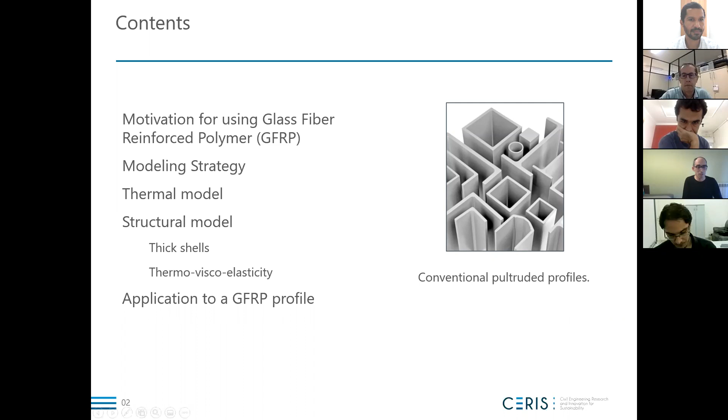In this figure, we can see a conventional pultruded profile. Pultrusion is the way that these profiles are made - in fact, I will show an image in a while about it. So FRPs are a wide class of composite materials consisting mainly of two parts: polymeric matrix reinforced with fibers. This way, these FRPs are in general very orthotropic materials.

They are applied in a wide range of fields, from aerospace, naval, automation, to structural engineering problems. Here we can see some facilities on production and also an example of application over a bridge. Applications in civil engineering are more recent, and they have a narrow way of applying them.

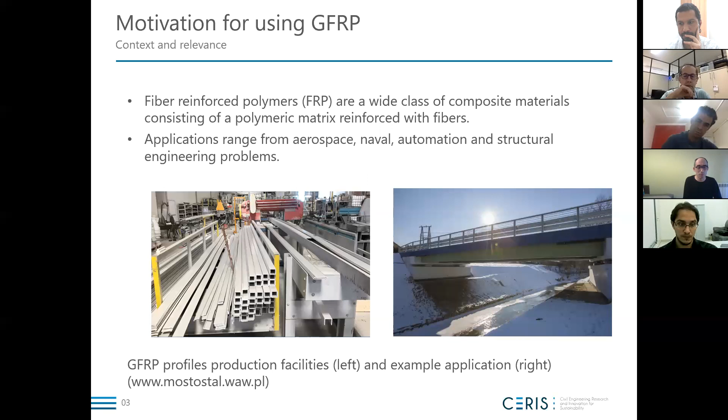So they are not - civil engineering is a field which is very conservative. Mainly it's always the steel structures and the reinforced concrete. So composites are more difficult to apply than the other, more traditional materials, and we will see in brief why.

These are some examples of applications of bridges, like this bridge in Switzerland, a bridge in Spain, and a building in Switzerland. So these are all made of FRPs.

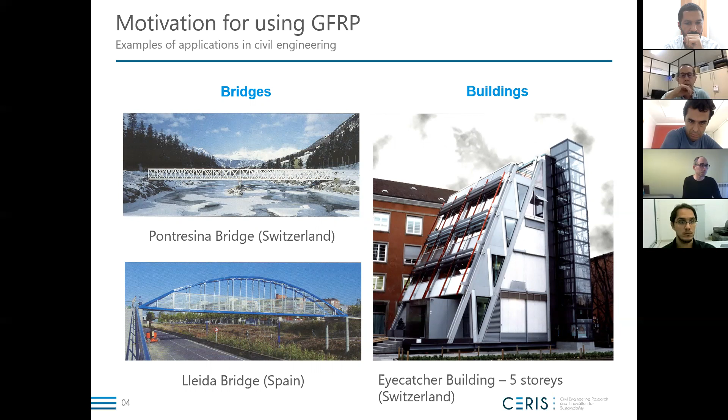As I told, this particular FRP, GFRP, is made of polymeric matrix and E-glass fibers. The process to produce them is called pultrusion. So what are the advantages and disadvantages of this kind of beam? They are very light, they have a high strength and high durability.

Well, the durability is more on interior applications. In the exterior, they can also suffer a bit over a large period of time, mainly due to the ultraviolet rays.

So what are the disadvantages? The initial and production costs, their high deformability, the lack of standards and codes which are very well established for other materials, their brittle failure, and the fire behavior. I will detail here this last aspect - the fire behavior will be the main focus of this talk.

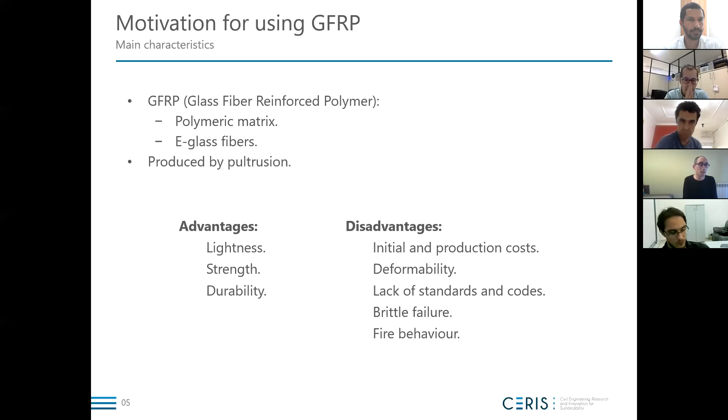So, what happens when we expose a profile made of GFRP to fire?

They have poor fire performance. When exposed to high temperatures, the matrix softens and decomposes rapidly, compromising the structural integrity. Although the fibers can still stand, they don't have a way to transmit the load that they can absorb.

So our objective is the development and implementation of a model capable of predicting the thermal and structural response of GFRP profiles subjected to fire.

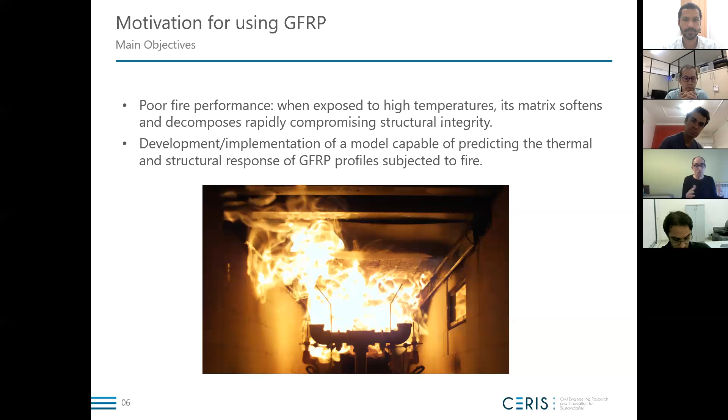Moreover, we also want to propose guidelines to designers, and if possible, guidelines to future standards and codes, because they are right now under development here in Europe.

In order to achieve a successful model, it's necessary to resource experimental laboratorial tests and also collaboration with industry manufacturers. In fact, the project this work was developed in includes a manufacturer of GFRP profiles.

It's called Alto Perfis Pultrudados, and I myself visited this factory, and we were able to see how the profiles are produced, to have more insight into the material that we are trying to simulate.

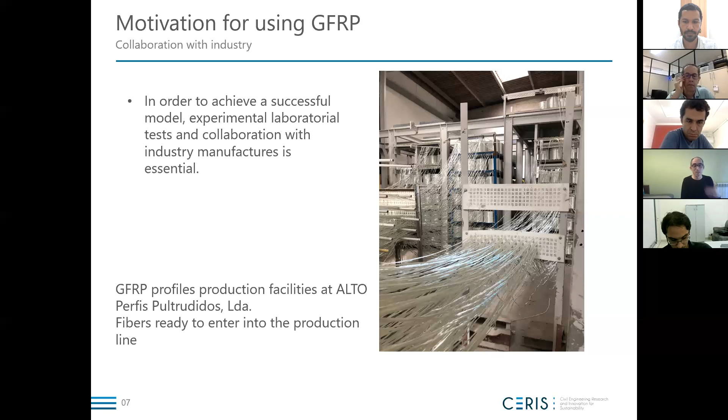Here we can see the fibers ready to go into the production line. Actually, the production line is quite simple - it's only the machine we see on the left side, and the fibers enter on one side together with the matrix, and on the other end we have the ready profile. So the process of producing this kind of profile is relatively simple, although expensive.

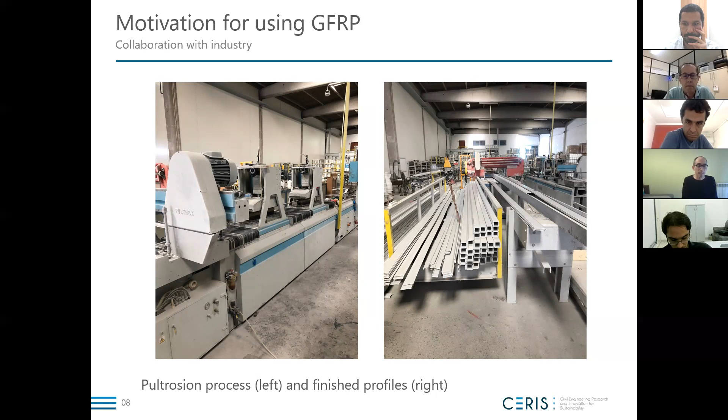So with 4 concentrated loads, 2 reactions and two loads, the loading we will apply consists of 2 constant vertical loads, made constant over time, and then we have the application of temperature underneath the beam.

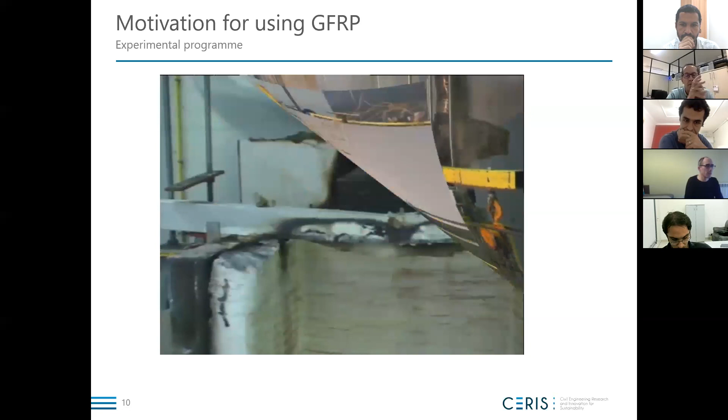So these kind of tests were made some time ago. Presently, we don't do this kind of test anymore, or we don't do it exactly like this, because we found some limitations.

The first limitation is that we want to emulate a beam inside a building, and the open air convection we realized changed a bit the thermal exposure. Also, this open cell allows a flux of air along the longitudinal direction, which we know would be very reduced inside the building.

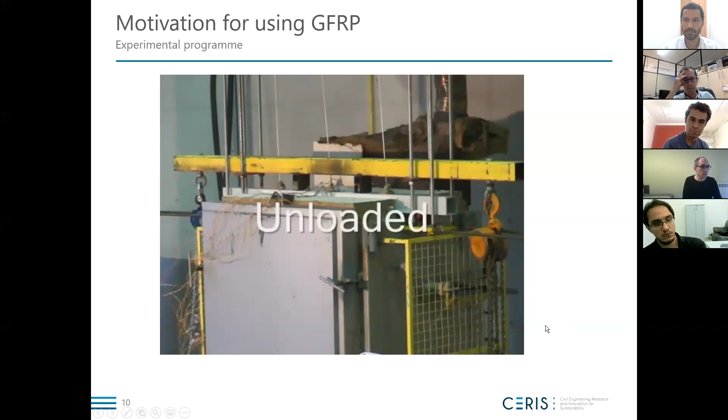Now the apparatus is slightly different from the one we used at that time. This is a more recent test, and we put this kind of protection around the beam.

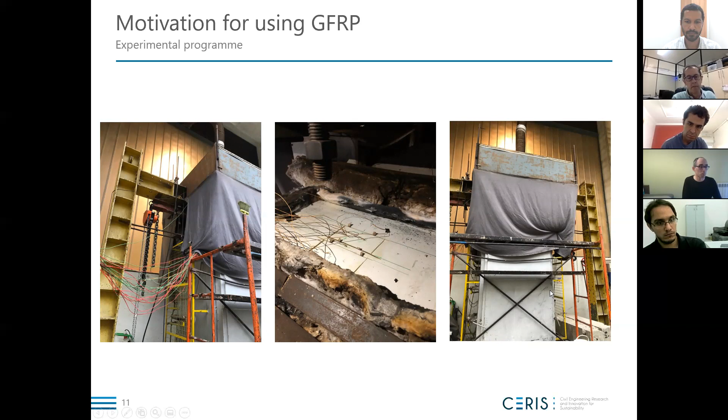Here we can see all these wires - it's merely to measure the thermocouples, the temperature of the thermocouples. And here it is shown how the temperature looks, how the beam appears at the end of the experiment, at the top of the beam.

So, in order to achieve a trustworthy structural model, the temperature distribution has to be correctly represented. The optimal cross-section design of such profiles many times includes cells.

Here we see a single cell on the left, which was the one tested in the experiment that I showed, and the one on the right is a different one, a Fiberline 300, which has 3 cells.

So the temperature distribution will strongly depend on the air convection inside the cells that we see here. Moreover, there are other phenomena like internal radiation that cannot be disregarded.

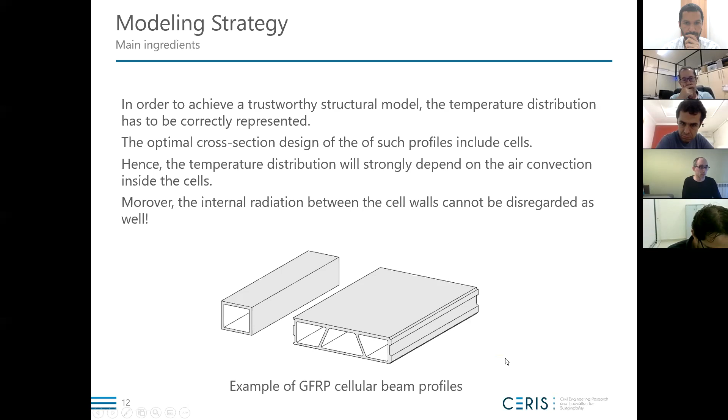Well, as for the mechanical part, we have to use for sure large strains, temperature-dependent materials, and full 3D constitutive models, including anisotropy and viscosity. The main variables here, of course, are the usual displacements.

So why not use a full 3D simulation for the whole beam? First of all, this is not practical for the engineer designing beams. Each beam would need a full 3D model with computational fluid dynamics and temperature evaluation. So it's too much, and the computational cost is very high.

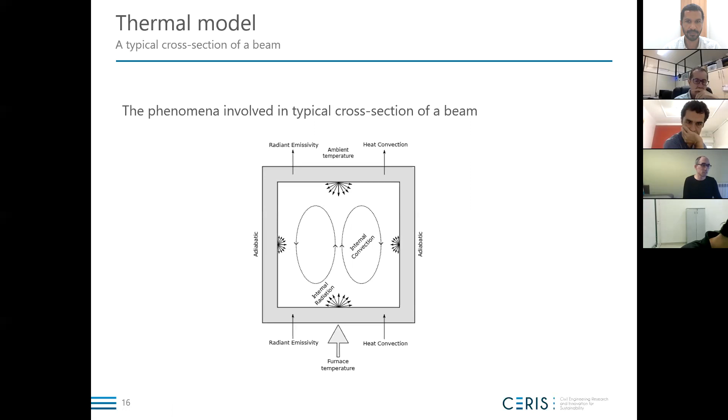So this is the phenomena that are decisive here and that we have to include.

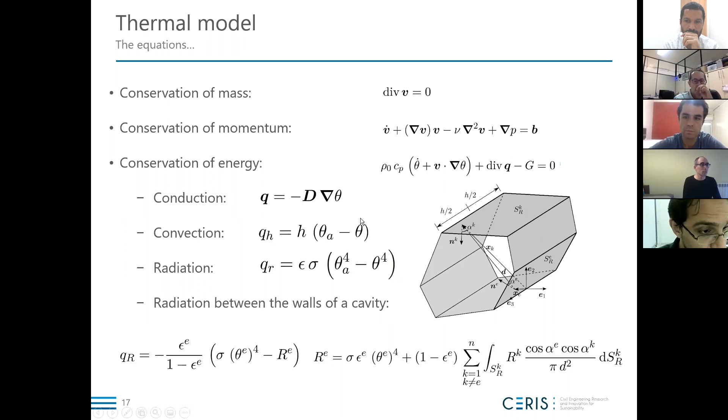So which equations govern these? These are like the normal equations you would expect. Together we have the Navier-Stokes equations, including, of course, the Boussinesq assumptions. Then we have conservation of energy, and then constitutive relations for heat, and then the boundary conditions: convection, radiation, and the radiation between the walls. There is a variable called radiosity, which is a kind of flux in the walls.

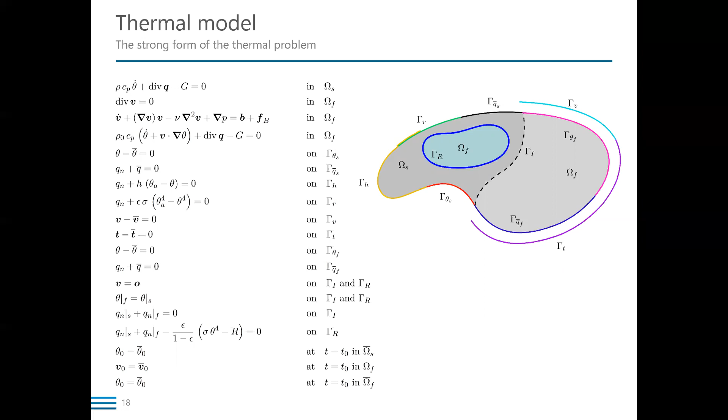These are the main ingredients in terms of the equations we need to solve. Here they are all gathered for a general situation. So this is the complete problem. I'm not including the Arrhenius equation here, which we sometimes use and sometimes don't, and we put the thermophysical properties at once.

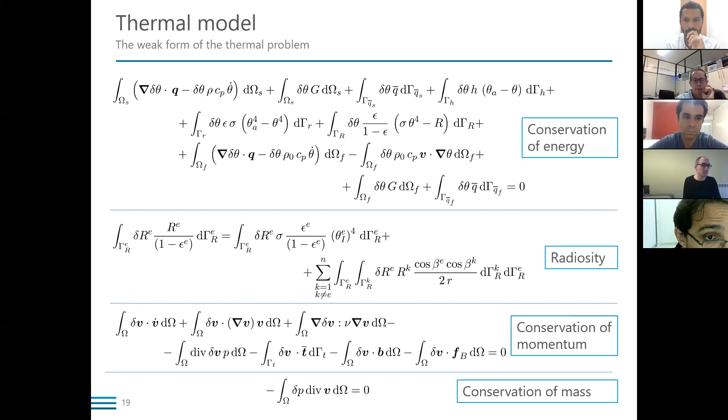These are the standard weak forms of each of the governing equations. I'm not going into much detail here. So we have the weak forms, we have their discretization. On one side, 2D elements for the temperature, for the fluid velocity, for the pressure, and on the other side, 1D elements along the internal cells for the radiosity. We use very standard Lagrangian elements here, a quite standard finite element apparatus.

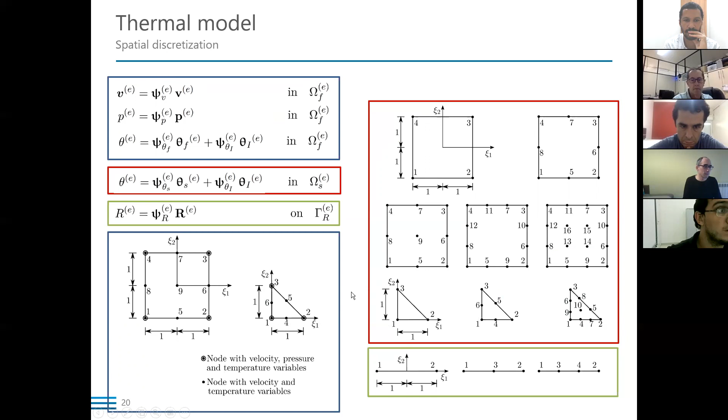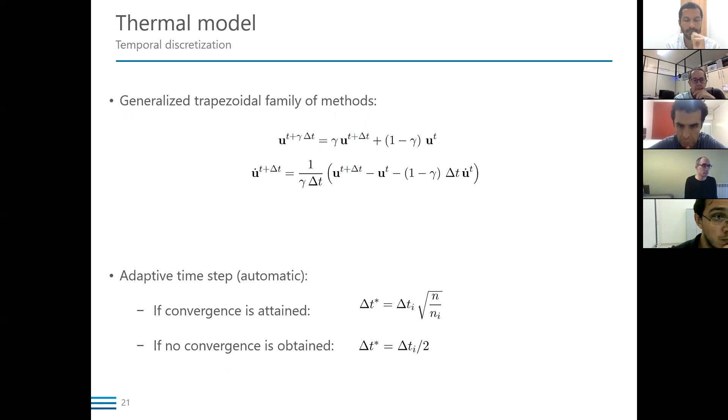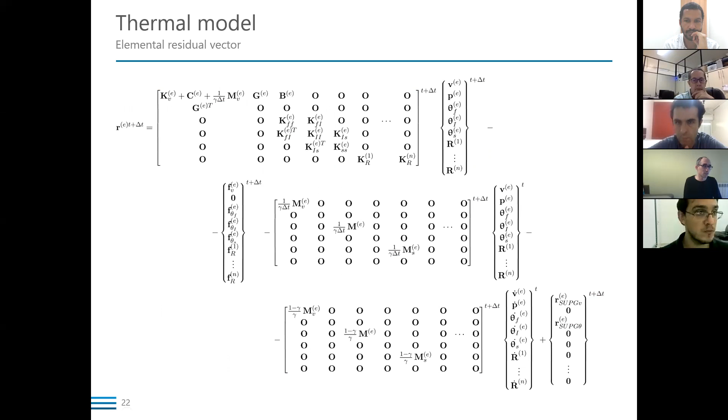For time, we use the generalized trapezoidal family of methods. In general, we use implicit schemes with a given time step, which we can tune along the analysis. In the end, we have this elemental residual, which is solved within a Newton-Raphson iteration. Here the matrices are non-symmetric due to the presence of the radiosity. So this is quite standard finite element calculation.

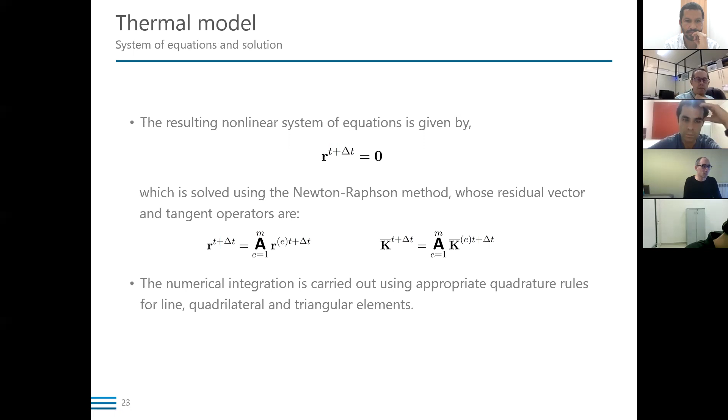Well, just a couple of examples. This is a main square with a single cell cross-section. At the bottom I will show the temperature, and at the top I will show the velocity. For the temperature, we have the temperature in the profile, which is the part we're interested in, and we have the temperature in the fluid.

So the appearance of these Bénard cells is very typical of this kind of behavior. Of course, we control the Rayleigh number to be sure we don't have turbulence involved. Notice that the time scale here is going very fast, because what I'm showing is about one hour of simulation, and here we're going too fast. In reality, this is not as fast.

You can see here the temperature evolving, and so the hot air is coming from the bottom flange to the top flange. I will speed this up a bit. And so this is the end of the simulation.

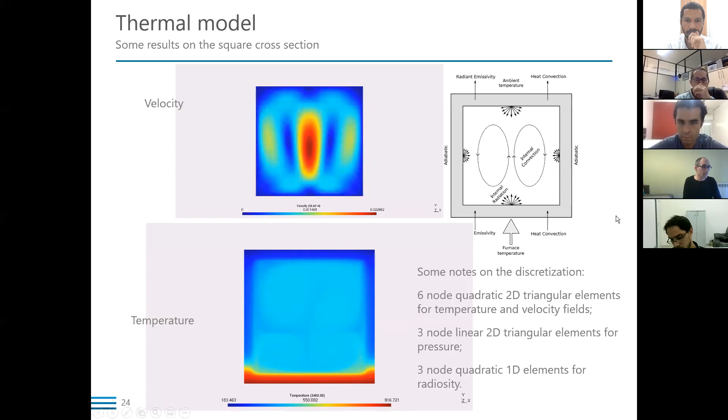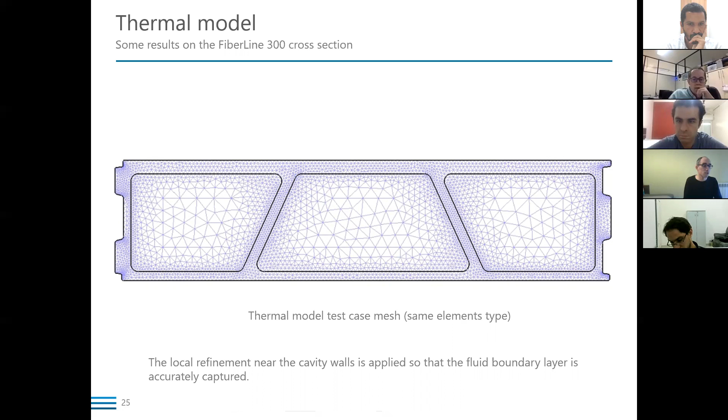What about a more complicated cross-section? In that case, we have to be careful with the discretization because of the boundary layer created by the fluid, but this is a typical mesh that we will use.

So this is just some results on this cross section.

As for the structural model, now that we have a temperature distribution and we know it along the time, how do we incorporate this information into a mechanical model? What are the requirements that we can use?

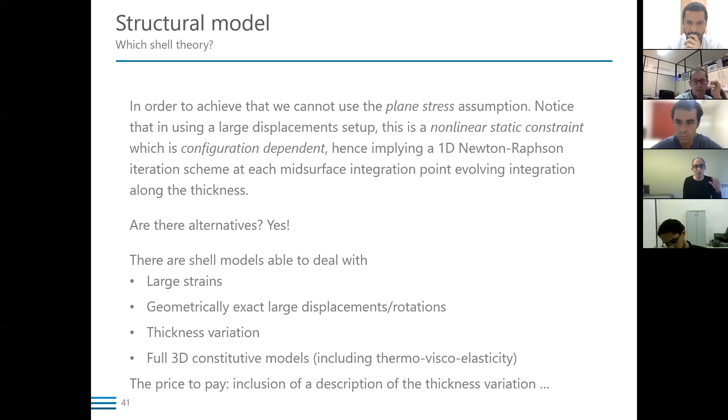Usually we say the shell has to be rigid. No, the shell doesn't have to be rigid, it can vary. So we just have to introduce the right ingredient to describe the thickness variation.

So the main schematic of the shell is an initial configuration. This is a reference configuration. Here is a reference, here is an initial, and this is the current configuration.

This initial configuration, we assume, is a kind of Kirchhoff-Love mapping type from the reference. And from here to here, it's a kind of general mapping. Well, the nice ingredient of this theory is the possibility of including a thickness variation description.

Which description? We include a linear term, described by this degree of freedom, P, and a quadratic term, described by q. The rest is quite standard these days.

This kind of geometrically exact theories started in the beginning of the 90s with Simo. There was, of course, work before, but not on this level of implementation in combination with finite elements.

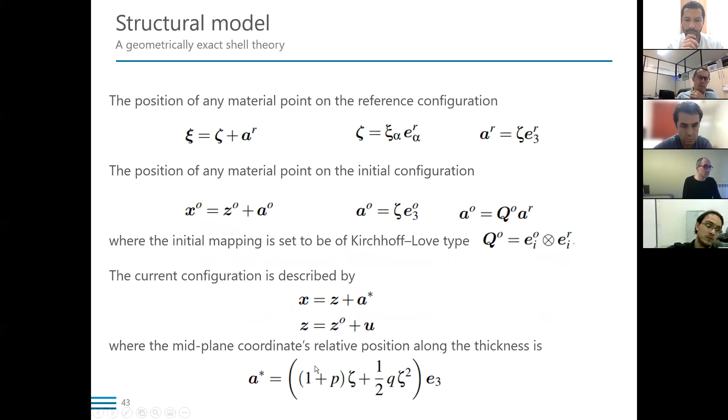So the generalized displacement vector is something like this. P and Q are scalar quantities defined over the mid surface.

A word of caution, of course, if we just use a normal finite element, there are lots of reasons that we can attain a locked solution here. There is the coupling between the bending modes and the shear modes, between the bending and the membrane modes, and we can have the incompressibility limit because we are using a full 3D law. So we have to be careful.

Here we opt for using a simple rotation non-conforming variable DOF per node triangular finite element, which is well tested by now. So the resulting nonlinear system is solved by Newton. We have quadratic convergence. The tangent is symmetric, provided the material tangent is also symmetric, and the loading is conservative.

So, what about this constitutive model? Well, as we can use 3D, we have lots of possibilities. So we used that Matlib library that I told you about before.

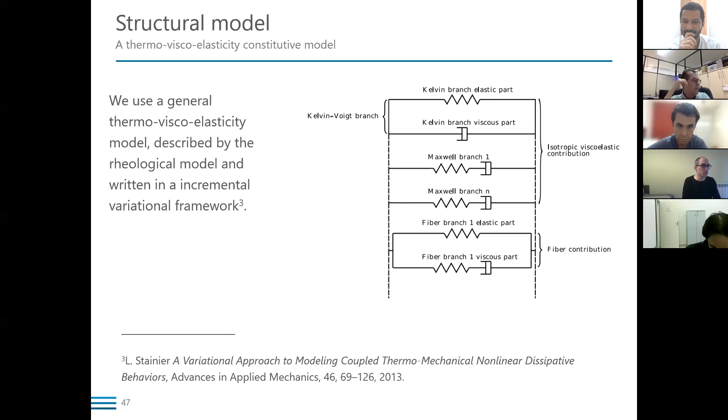So we use a general thermo-viscoelasticity model described by this rheological model that we can see here. And this is, of course, written in terms of an incremental variational framework. So just a very simple overview.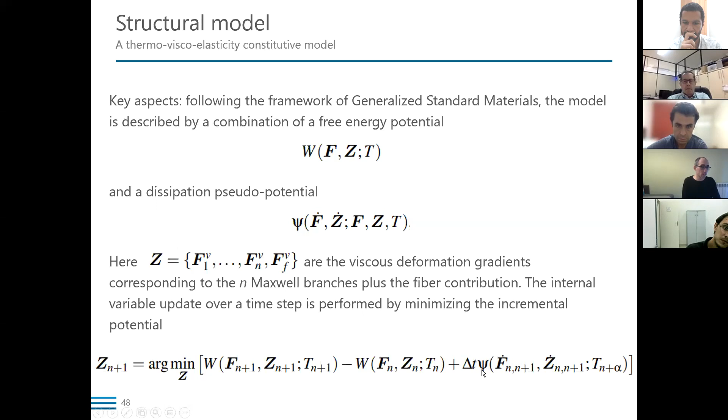We have a combination between a free energy potential and a pseudo potential. This is, of course, a function of the gradient deformation, of the viscous deformation gradients. So we have here several variables to take care of. In the end, the internal variable update over a time step is performed by minimizing this incremental potential, delta T is represented in here.

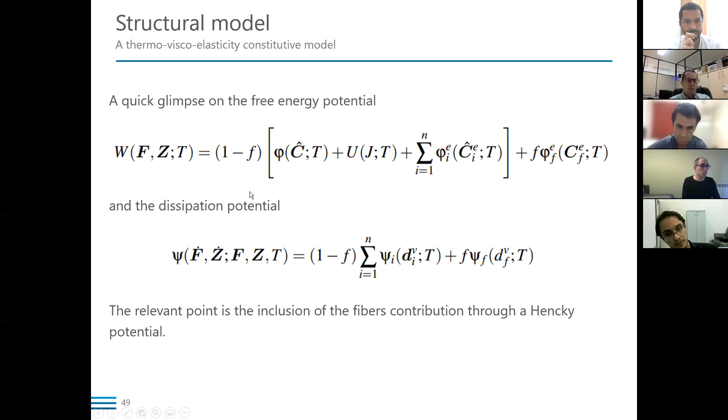So, what about the free energy potential? Well, it is quite standard. We introduce here some function of the fibers. The inclusion of the fibers is essential in both these potentials. Let's see some simple examples of what we can have from this theory.

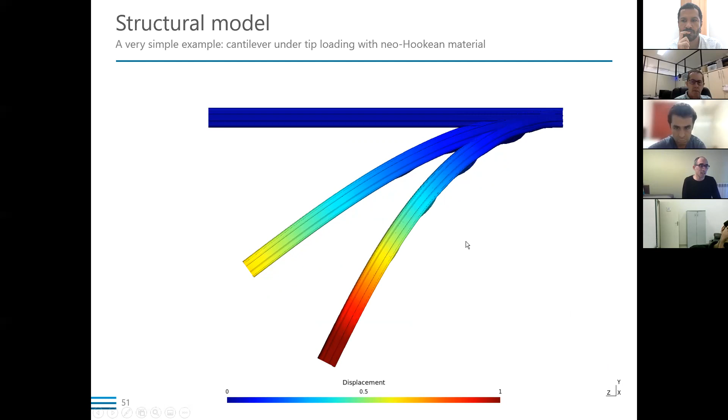The first thing that draws our attention is what's going on here: it's just a local buckling of the bottom flange of the beam. Here are three deformed configurations of the beam, and you can see what we're getting here—it's just local buckling. Maybe I forgot to say that we are using here a simple neo-Hookean material, so a hyperelastic constitutive relation.

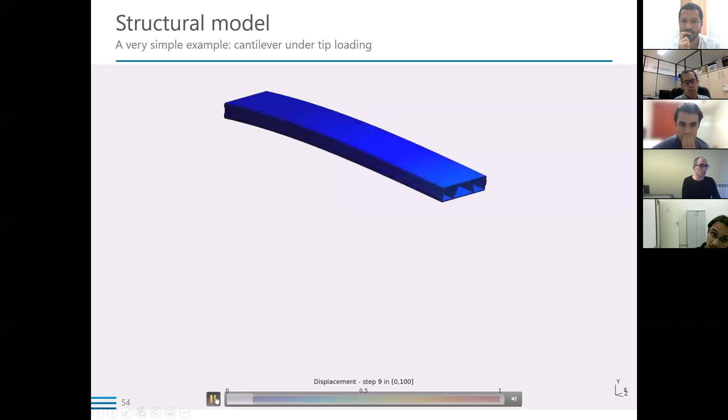So this is a small illustration of a static analysis. This is just a sequence of events. This is static, not dynamics. There's no dynamics in here, it's just a sequence of events.

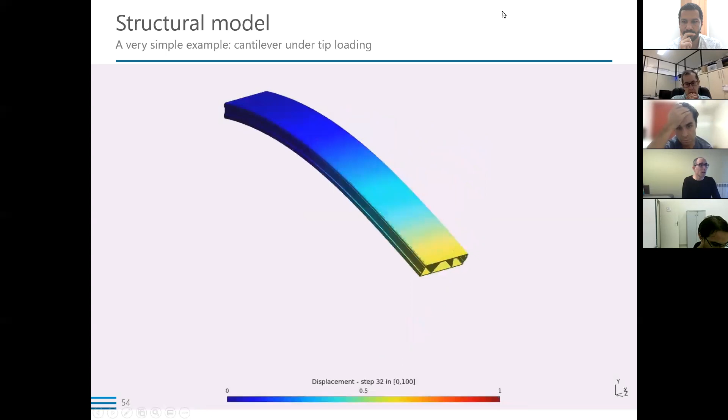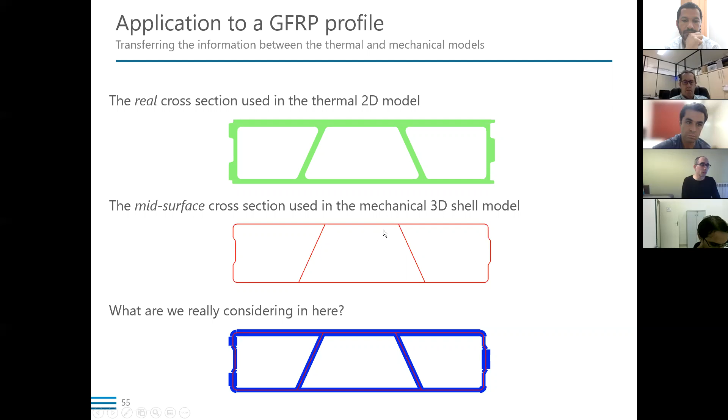Let's look now at a crucial step, because I have this cross section, this green one, which is a real one, a complicated one. I have this mid surface, but how do I transfer information from one into the other? They are not really the same. We see that there are some differences between what is a shell and what is the exact cross-section. So we have to devise here an algorithm to transfer the thermal information into the mechanical part.

And we see, for instance, this part that it's not overlapping, so it's impossible to transfer this part of the information.

But that's the price to pay. This is still a shell—although a sophisticated shell model—it's still a shell, it's not 3D.

So to feed this constitutive relation, of course, we need data. And where can we get this data? From the manufacturer or from lab tests? We did some of the tests right in our lab. This is the work of my colleague João Correia and his group.

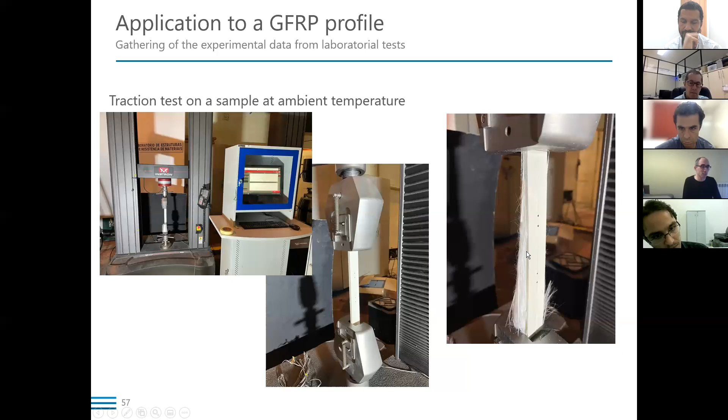So here we have, for instance, a traction test on a sample at ambient temperature, and we see how this behaves in the end. Here is the beginning, here is the final configuration. This is a traction test, and here are shear tests.

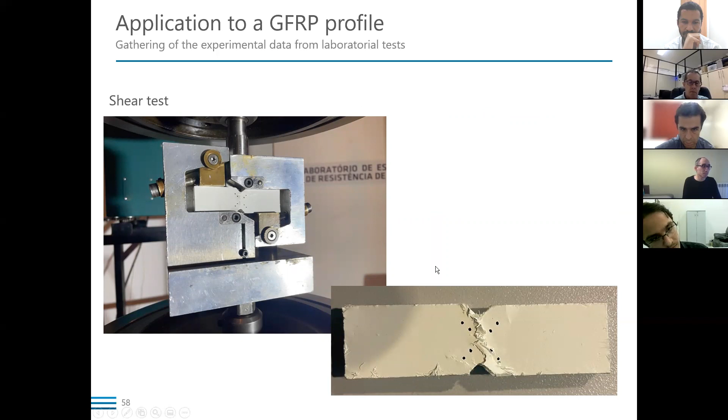You see how a sample looks in the end when subjected to a shear test. We are still doing, we even did one yesterday, a 4-point bending test. This is just to assess the linear behavior of our true beam. It's a 4-point test. We see here all the instrumentation, so this is a load cell. Here we have a rigid beam, just to split the load in two.

We have sensors to capture the displacement, and more sensors on the supports, as we can see here—these are all sensors to capture the displacements. We also see a strain gauge to measure deformations in the beam. So this is not finished work, this is ongoing, and we are still trying to assess these properties.

This part of the work was significantly delayed by COVID, although at home we could program and continue with the computational part. The experimental work still needs the lab, and this part was strongly affected by the pandemic.

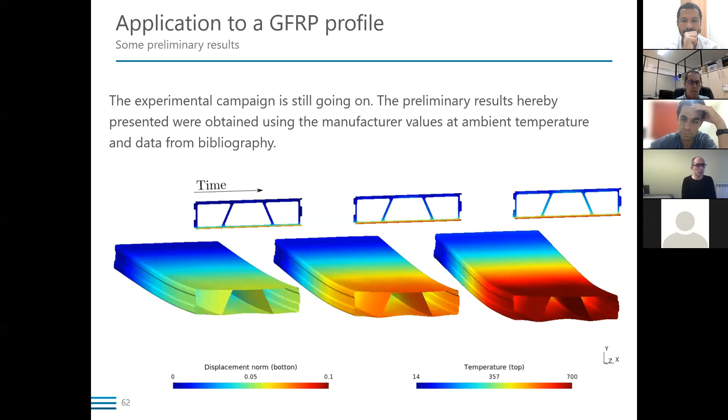So what we have done is resort to manufacturer data, but the manufacturer only gives data at ambient temperature, and we resorted to some bibliography to start running some tests. But as I say, this is not yet something we can compare with our own experiments. This is an ongoing work.

So as closure, we can say that the simulation of fires into these FRP profiles is a challenging multi-physics task, because it involves very different kinds of physics. So we tried to propose a model which is decoupled, in order to avoid the full 3D analysis, which would be quite complicated and cannot be done to design a very simple beam. In practice, it cannot be done for each beam, for each span, for each loading—it would be very complicated to do that.

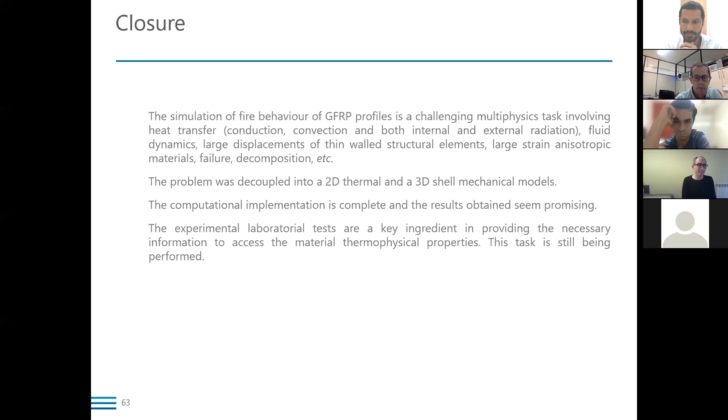So we tried to provide something simpler, and I think there is still room to simplify even our model further. It's also very important here, the experimental part with laboratorial tests. This is a key ingredient, and we are waiting for these results. Maybe I can present them at the real Mecsol in October. So I would like to thank you for your attention, and if you have any questions, I will be available.

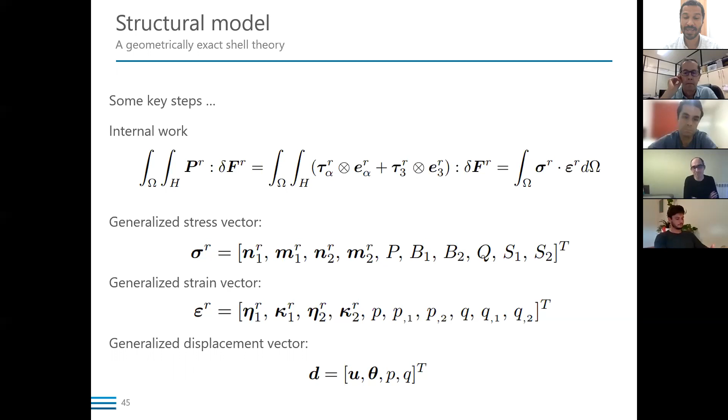Professor Carlos, thank you for your talk today. I have very basic questions just out of curiosity. It's a very complicated problem. When we design structures, we're usually interested in a failure criteria that the structure remains in the linear elastic regime, which is kind of a simple requirement compared to what you're talking about here—it's a very complicated phenomenon. Now you're saying you found that when you use FRPs, the area exposed to fire is also very relevant, right? The behavior of the structure is strongly dependent on the area exposed to fire. So that adds an additional layer of design. If you're designing a bridge or a building, now you have to be concerned not only with moment of inertia or those kinds of things, but also look at the area exposed to fire. I was wondering if you came up with any guidelines for engineering design that consider this—like if you're designing some kind of structure with this material, this is what you have to take into consideration.

Well, as there is, in fact—well, in the last 3 to 4 years, it's under development.

There's no standard code here in Europe for FRPs yet. There are already things in the United States and I think Australia, but there's nothing definitive here in Europe. There is only a provisional code, which isn't even available for designers.

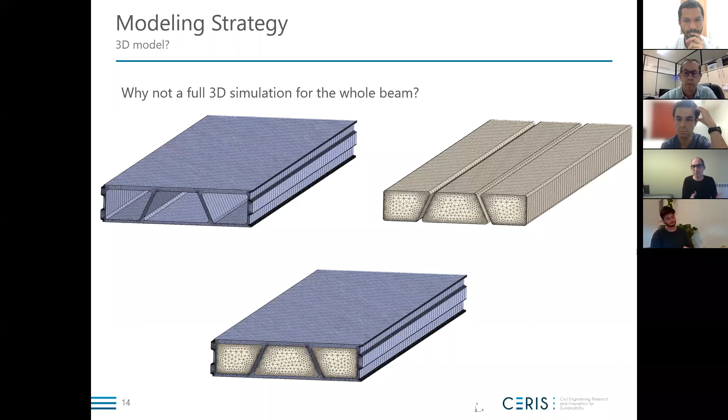So what have we done? In order to know what kind of heat we should use, we use what I'm showing here. This is the ISO 834 1975 interior fire curve. Basically, we pick up the fire curves which used to be for the design of other types of structures, like steel structures. This is used in steel structures, and we adopt those curves for the action on our beam. This is called the interior fire curve. There's also an exterior one, which is actually less demanding, for design of structures in the exterior.

So there's no specific solicitations yet for FRP structures. Now, what we know is that these kinds of structures—I wouldn't say they suffer more, because steel structures also have to be protected according to any standard. Usually we do some coating over it with some element that can sustain fire during a period of time. Concrete structures perform better under fire due to the quantity of air enclosed in the concrete.

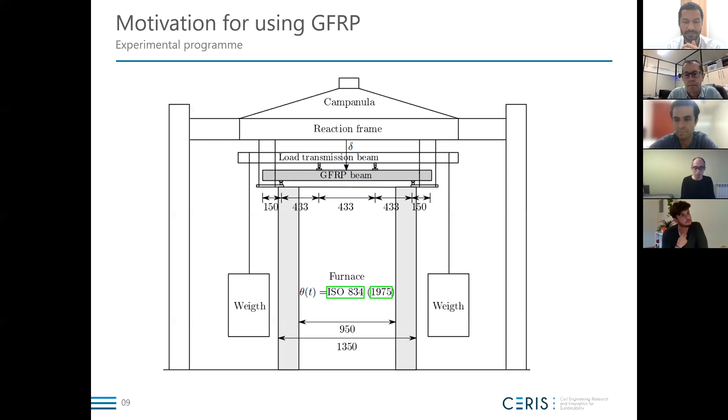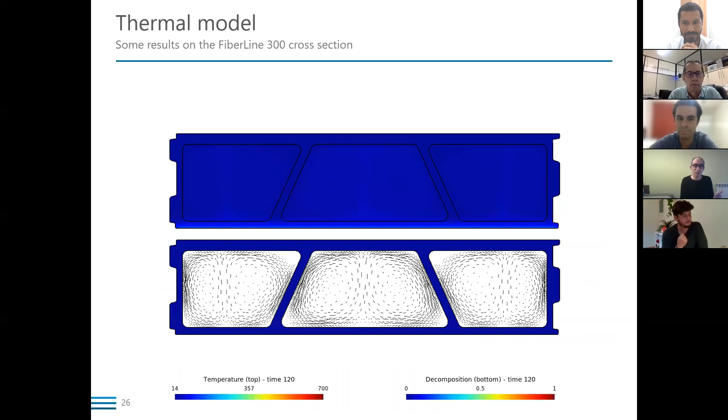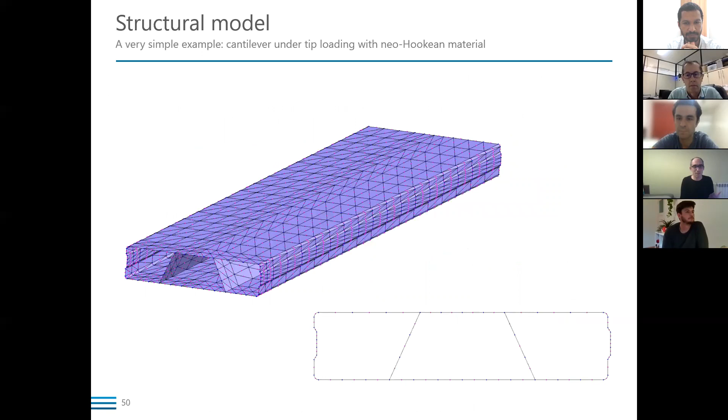You still have that problem of transmitting the information from the real cross section to our theory, no matter what cross section, like this detail. Okay, I think you can see my mouse. In GBT, you still have these kinds of problems. So in the end, there is still this disadvantage of having to transmit something from a real cross section to something that we are considering.

Because in GBT you also have a thickness variation along a thin wall. But I think we could use it, and I wouldn't find, at least in principle, any limitations. We would have to see the constitutive equation, but probably it would be possible as well to incorporate something like I did, which is to express how to add some degrees of freedom to the thickness variation. As long as you assume the cross section doesn't have to be rigid, and it can change in plane and out of plane, I think you can accommodate a full 3D constitutive equation.

Thank you. I'm sure Professor Dinar will have a very heated conversation with you if you bring up the topic, since he's always defending GBT. But I would be very interested to see some comparisons. I think it's actually something that, as you said, is possible, but we have to discover what the limitations are once we are actually applying it, right? But thanks.

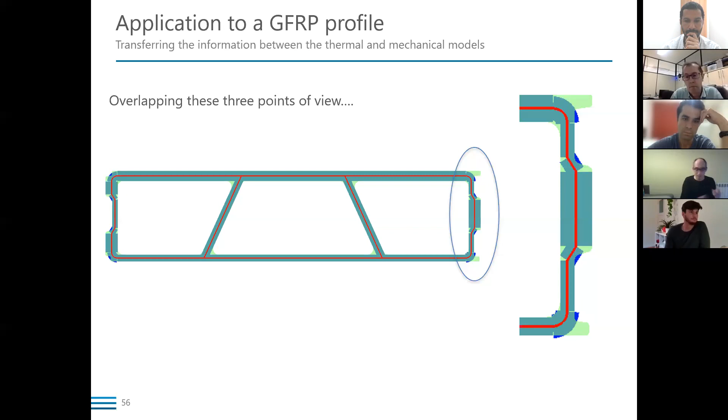So regarding this very specific model where I'm using the thermal part and transferring it to the shell, that would really depend critically on the shape of what I'm modeling. Don't forget, and this is crucial, that I'm assuming this distribution of temperatures does not vary significantly along the span of the beam. If I lose that kind of domain of analysis, then I cannot apply this part. There's a figure which explains this a bit. So if I don't have something similar to this setup with a constant cross section, I cannot use my model.

I didn't speak about this: the oven goes from one support to the other. So this part goes from one support to the other. Now you can see my mouse. From here to here, there's no heat underneath. So what we do is just a linear interpolation in between these edges, and we say we have air temperature at the end, and the oven temperature in this cross section.

So to be quite concise, I think the part of the shell and the 3D constitutive relation could be used for a general shell, but then it lacks the thermal part, the thermal analysis. And what we want to avoid here is a 3D CFD analysis. That cannot be done in a design cabinet in order to design a structure.

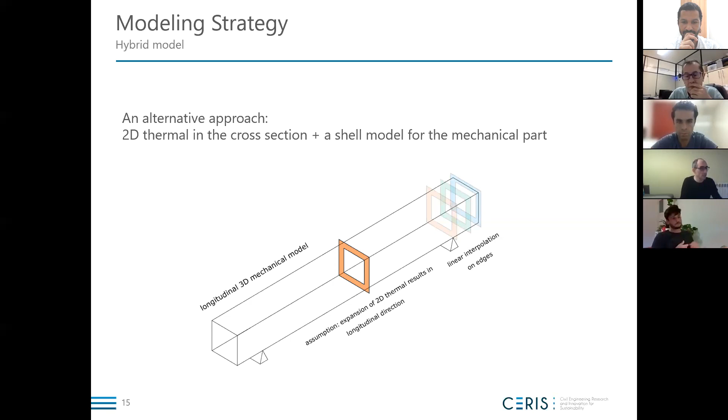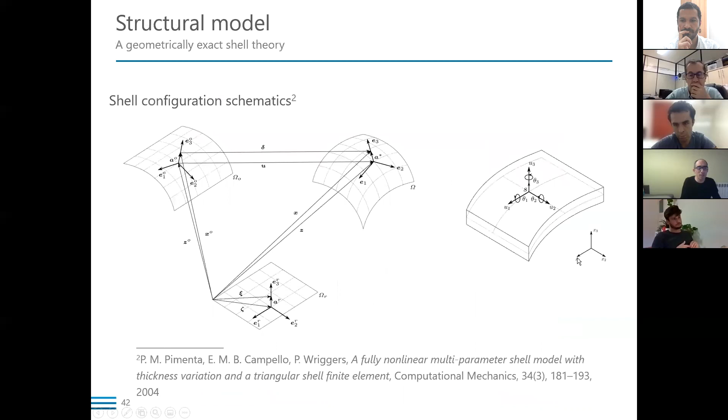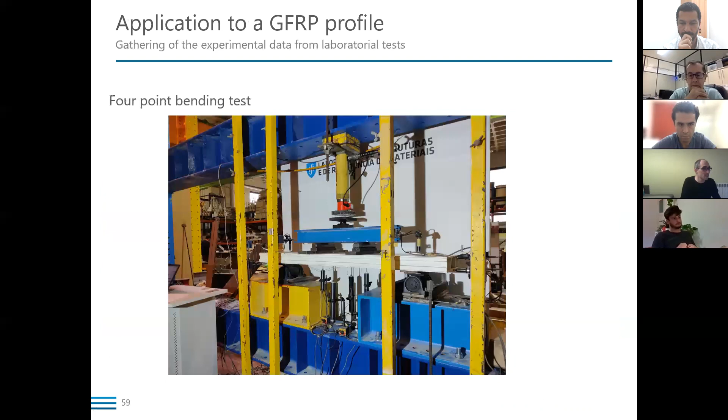So that part, well, first of all, if you look in the bibliography, it is very, very scarce. There is no data for that kind of temperatures. There is really no data.

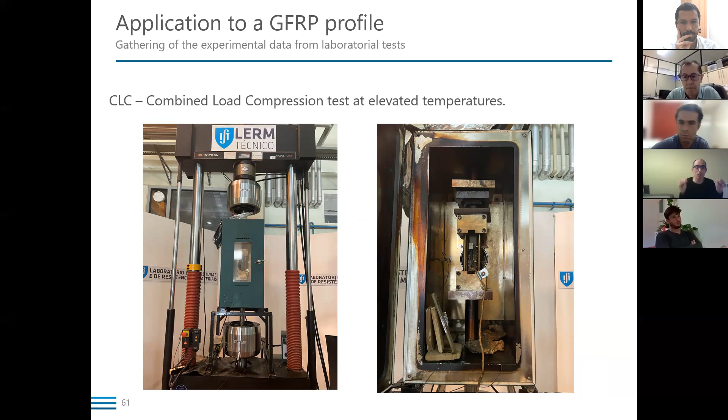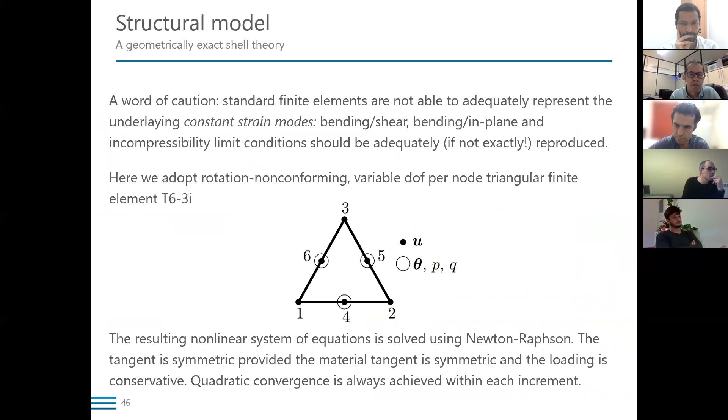So what we have done is, based on the scarce bibliography in the topic, we try to simulate. When we don't have any information on the properties, what have we done? Well, until now, we say there's no stiffness coming from this Gauss point, and that's it. So when we don't have any properties, any information, we say disregard the properties of this point. It's like saying the material doesn't exist.